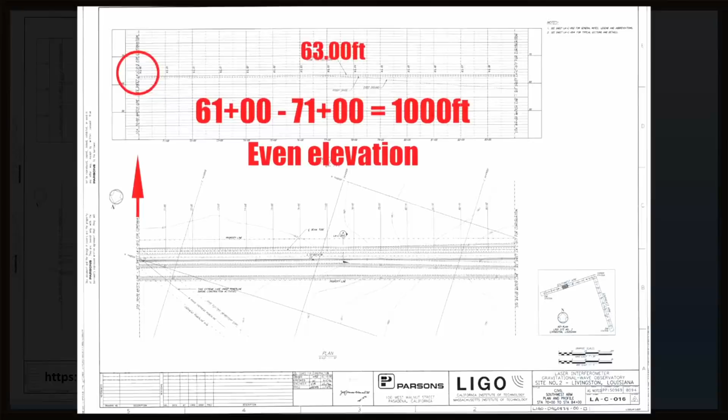This is LIGO. This is the southwest arm. At the start, it's an elevation of 64.12 feet, and at the end, it's 64.09 feet, which Blue got right. What he failed to mention was that in the middle, there's a span of over 1,000 feet at 63 feet, which is even elevation.

I didn't mention those elevations you're talking about, Mobius, because to me at the time, they weren't significant. But now that you're apparently calling this into question, somehow trying to insinuate that LIGO's pad is level, I thought it might be a good opportunity to look at this in a little more detail.

Now this is one of the LIGO drawings, and you can find this drawing at that website you see at the bottom, or just Google LIGO as-built drawings. That website will pop up. This drawing pertains to that section you see in the inset at the lower right. It takes 10 of these drawings for each of the arms in order to show all of the elevations. The center point of this arm, this is the southwest arm, is right there. It's closest to the 6,600 foot station.

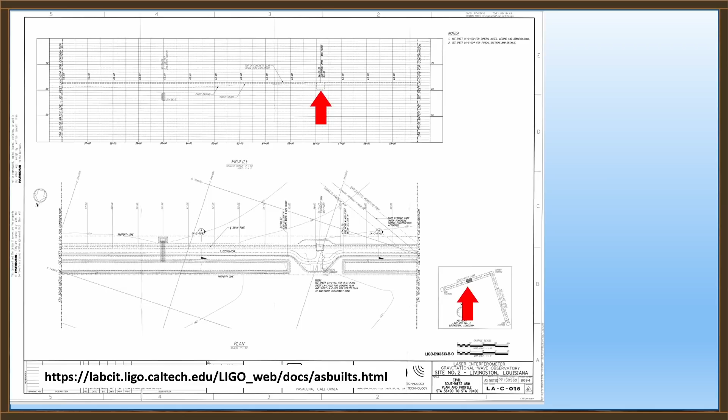Now sections continue, of course, on either side of this. There's the next one that picks up at the 7,000 foot station. But we don't need to concern ourselves with that. We're only interested in the portion shown on this particular drawing. So I've expanded that to try to make it a little more readable, and as it turns out, the numbers are still really too small to see very well. So let's put them on there in larger fonts so that you can see them.

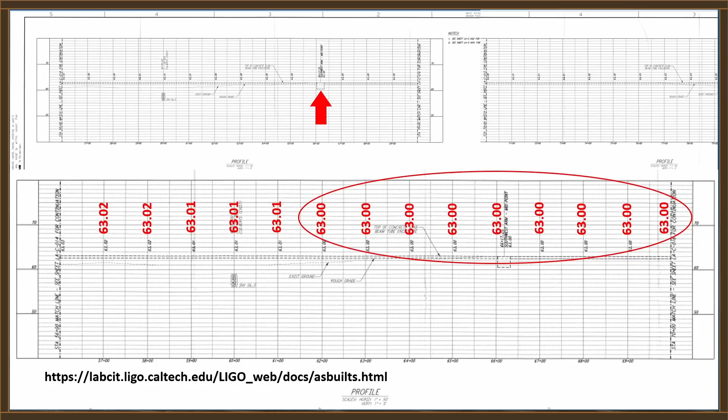Now the area that Mobius is calling into question is this area over here. You see 9 elevations spanning a distance of 800 feet that list an elevation of 63.00 feet. Does that mean it's flat? Well, I don't know. What should it be? If the Earth is a sphere with a radius of 3,959 miles, what should those elevations look like? I'll tell you what, we can figure that out.

There's a spreadsheet, and at the top you see those stations, and they're lined up with the drawing, starting at 5,700 feet and going up to 7,000 feet. In the next line of the spreadsheet, you see distances away from the center point. And remember, we said the center was closest to the 6,600 foot station. So there's 0 right there. In the next line, we've calculated what the compensation for Earth curvature should be based on that very simple approximation formula of 8 inches per mile squared. And you see what those numbers look like. From 0 to 100 feet, the change is only 2 ten-thousandths of a foot.

So let's do this. Let's round those numbers to 2 decimal places, and you get what you see in that line. And finally, let's write down what the actual measured elevations are. You see them there, and you see that there is absolutely no difference between the actual elevations listed on the as-built drawings and what we would predict they should be based on an Earth that has a radius of 3,959 miles.

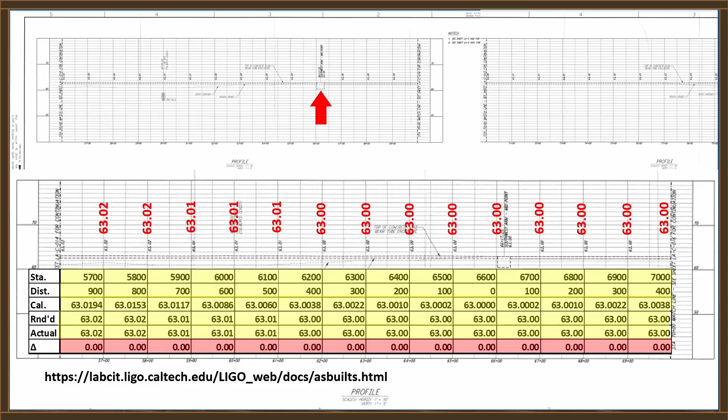But now, Mobius, there's a couple of things wandering around in the middle of LIGO that you're ignoring. There's a couple of these. And those pachyderms are standing at the midpoint of both of these arms. Let's look at the southwest arm. Look at these elevations. 64.09 feet, and 64.12 feet. Almost exactly the same. But the center elevation is 63 feet.

Now, what does that mean? Well, on a flat plane, if you have those two end elevations and a measured 63-foot elevation in the center, there is no way that forms a straight line. On the other hand, when we apply those elevations to an arc that has a radius of 3,959 miles, it does form a straight line.

What happens on the other arm? Well, there we've got 64.12 feet at the vertex. We've got 60.04 feet at the far end. So there's an elevation change there of a little over 4 feet.

What should that elevation be in the center? Well, that's easy enough. This is Euclidean geometry for you. Those are similar triangles, so we can simply average those two elevations. And we find that the center elevation actually should be 62.08 feet. What is it? In reality, it's 61.05 feet, about a foot low, just like the west arm is.

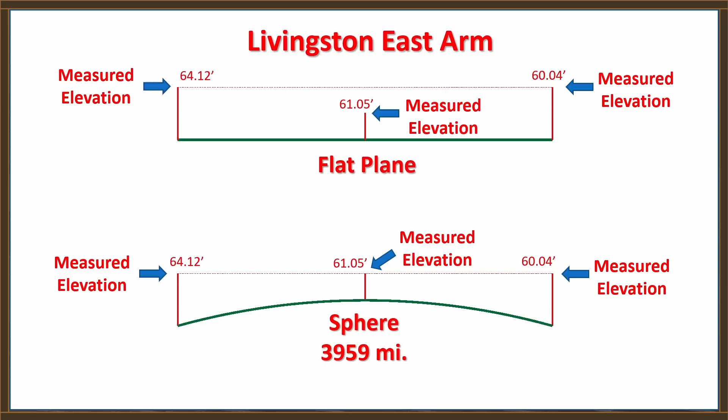And again, on a flat plane, 64.12 feet going down to 60.04 feet will miss the measured center point elevation of 61.05 feet by about 1 foot. But if you put that on an arc with a radius of 3,959 miles, it forms a really nice straight line.

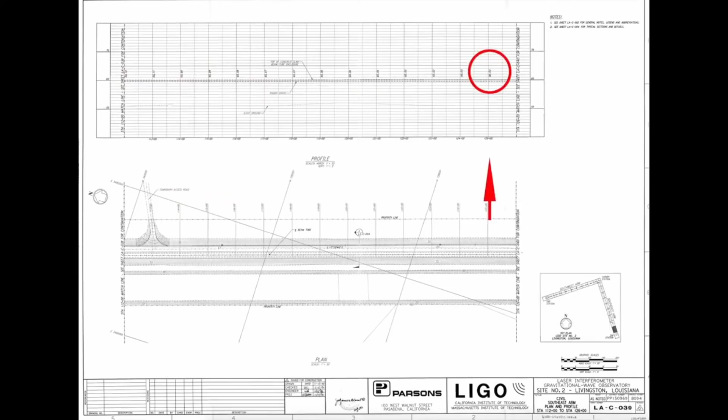Then at the southeast arm, the beginning is 64.12 feet and the end is 60.04 feet. And what Blue also forgot to mention was at the end of the southeast arm, it's elevation of 60.3 feet for 800-foot span of even elevation. And what Mobius is trying to avoid is

Off the top of your head, what is 0.01 feet equal to in inches? Think about it for a second. I think it's around 1/8 of an inch, something like that, maybe. That's right. Yeah, just under 1/8 of an inch. It would be 0.12 inches. Right. And your point being? My point being that if they're getting concrete that close, they're doing a hell of a job.

Yeah. So if an elevation continues for an additional 400 to 600 feet beyond the 900 feet, and it only deviates 0.01 or 0.02 feet for an additional 600 feet, what does that show in the drawings? Not what you can imply or what you can infer from your model, but what does it show in the actual drawings? That's what I'm asking.

Well, it shows that what you can do is take that center point at 63 feet and take 100-foot increments like they've taken, and just do something really, really straightforward and simple, like 8 inches per mile squared, and apply that to those distances, and then see. So you're applying a model. Yeah. I'm asking you not to apply a model. I'm asking you to tell me what the drawings say, not what you infer based on a model.